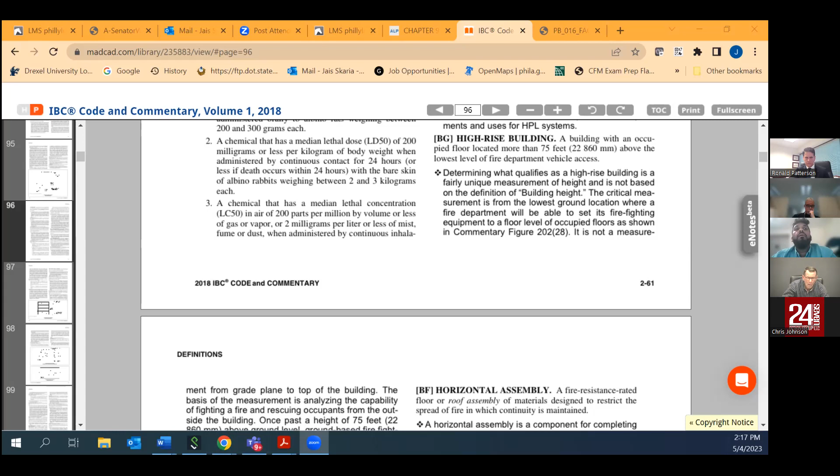It is not a measurement from grade plane to the top of the building. The basis of the measurement is analyzing the capability of fighting a fire and rescuing occupants from outside the building, right? Once past the height of 75 feet above ground level, ground-based firefighting will not be sufficient. High-rise buildings must comply with the requirements of section 403. Because there's occupants past the height of 75 feet, that's the reason why high-rise requirements are required for this specific building.

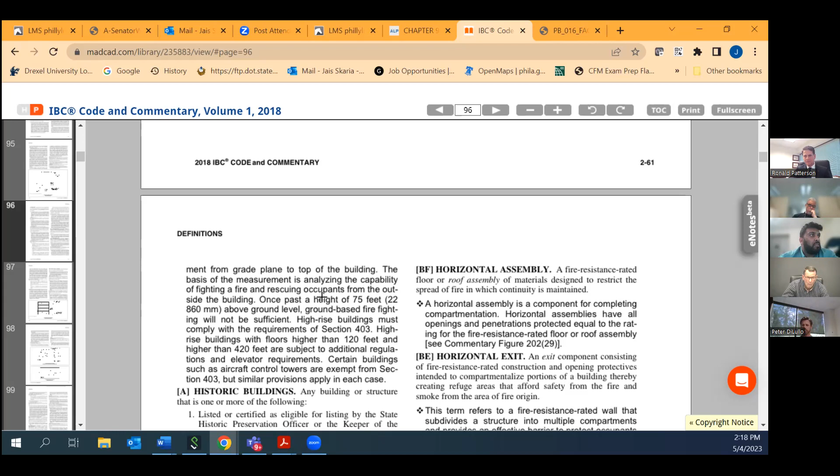Jace, isn't that entire section you just read predicated on occupied floor? Just hold up here. Sorry. Yeah, that's what I was going to ask you, Jace. It said back in the beginning, occupied floor. And so you're saying occupied floor doesn't have to be enclosed? Where do you say that? Back up to the beginning page. The critical measurement is based on those.

So may I read the definition of occupied floor from the IBC? Sure. So, well, occupiable space is the closest thing we have: a room or enclosed space designed for human occupancy in which individuals congregate for amusement, educational, and similar purposes, or in which occupants are engaged at labor, and which is equipped with means of egress and light and ventilation facilities meeting the requirements of the code.

Go ahead, Jace. I mean, as a department, that's what we classify as a high rise, and we are the authority having jurisdiction. I know that Mr. Patterson went to ICC and got an interpretation, but based on our information and based on the chief code official, we are requiring this to meet section 403 of the 2018 IBC, based on this definition and the research that we did on our end.

So if I could just add one thing, and this is similar to what I said when I last testified. As a design professional operating in the city of Philadelphia with our offices in Center City, I can point to examples of projects that have been approved under the same code with the exact same building with an occupant load of 498 people on a roof. Understood.

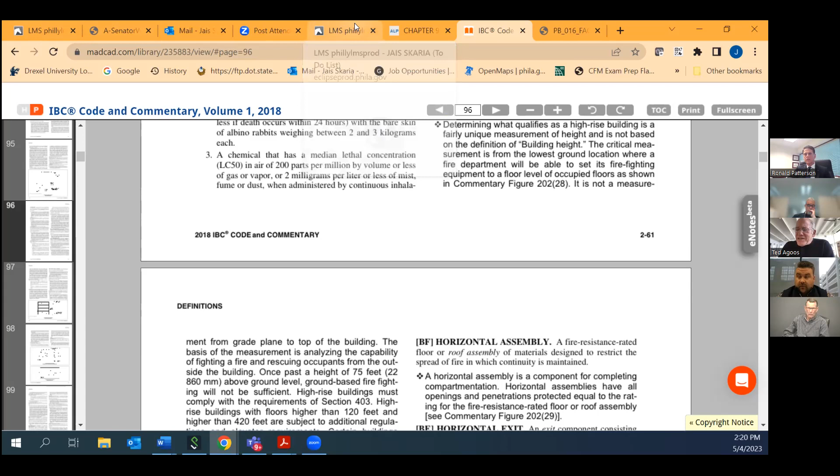But I mean, I understand your concern and your comment in terms of codes changing and evolving, but that being said, the timing is what the timing is, and an FAQ is not an amendment to a code. I'd argue that all day long, Ted.

I can't speak to whether it is and how it's regarded, but, sure. Leave that up to Al and I, and the fire department, to kind of address how an FAQ, what's the process for that either turning into a bulletin or being adopted as part of a code amendment, correct.

Don't know. So Jace, the International Building Code that they're going by in 2018, is that where we're going off of? Is there anything different today? We're still on 2018 IBC.

And how high is the floor below, from the ground up to the floor below the deck? 73, was it 71, Christie? 71 and change? 71.5? Sure, somewhere around that, 71 something. 71 feet 7 3/8. That's to the top floor, not to the occupied deck. Right, that's what I was asking.

Occupied floor. Yeah, because looking at it, if that's under 75 feet and we're not considering the deck a floor, then that's my question. That's why I asked that. And what's the height of the deck above? 83 and change, somewhere in that range. Okay. The roof deck, 83 and change.

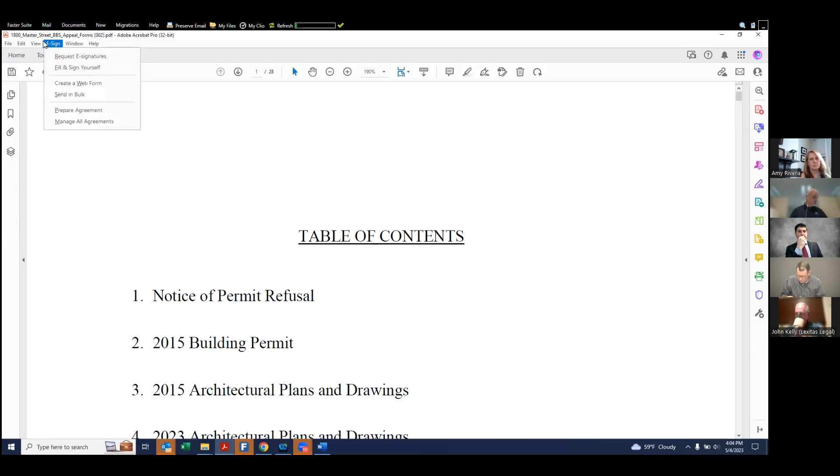So in my materials, you should have received the notice of permit refusal. This is an interesting scenario. We obtained a building permit in 2015 to put a 4-story addition to 1800 Master Street, which is a corner property at 18th and Master. For various reasons, including issues with the neighborhood in terms of vandalism, a corporate restructuring, and a pandemic, we built the 4-story structure, did external and internal framing and put the facade up, but we have not completed our project.

So in 2023, my client hired a new architect who merely filed the same paperwork that my client filed in 2015. Unfortunately, the code changed where, because it's a 4-story structure, it required 2 sets of staircases. I will say this, the 3rd story to the 4th story is 1 bi-level unit, so the opening is merely on the 3rd story. But anyway, we're seeking relief from this board to allow us to continue our development of this building pursuant to the 2015 building permit, where the plans submitted in 2015 were merely refiled in 2023.

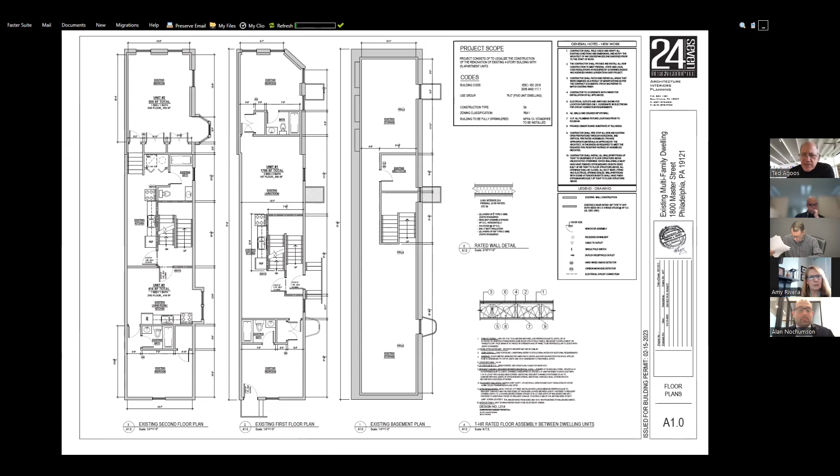Amy, do you have the screen control? No, I don't have it. Oh, okay. That's Alan's screen. Yeah, there we are. All right, so 3rd and 4th. So you're asking whether this stair tower that shows up on the 3rd floor, well, I guess I was looking at older plans, it's a little bit beyond. Could that stair tower be accessed from the 4th floor?

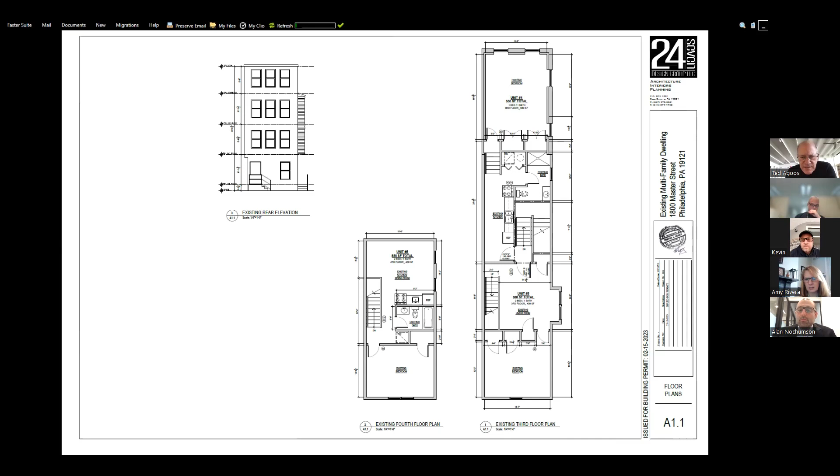So the architect, unfortunately, is not responding to my telephone call. I would ask Mr. Matheson, he's an experienced contractor. Kevin, is that a doable solution, what the board member stated? I'm not following. So I'm zooming in. The stair tower is kind of beyond the fourth floor. Could that stair tower be extended up? Yeah, my understanding is this is the internal staircase tower for the building itself. Correct. Right.

So I think, Amy, what you're suggesting would be that where that existing kitchen dining room is in unit 5, if the stair were continuing up, it would be a bump out on the right-hand side of that floor that would enable you to continue up from below. A bump out of the roof? Right, but to get to it on the third floor, there's that little closet. That would kind of go away. You would get onto that stair and continue up. So essentially, I think it would still give you 2 ways down into unit 5, rather than tying you into the main stair.

Maybe I'm just trying to wrap my head around it. That is the main stair, isn't it? Yeah, it is. You'd be funneling right into the main stair tower. I'm just wondering how you separate it, where instead of going into a closet, you would be going to a vestibule that would let you into the lower floor of the bi-level. Yeah. So let me try to call the architect again. Or you just have another landing over that stair tower, somehow you get back down. Yeah, that closet would probably go away.

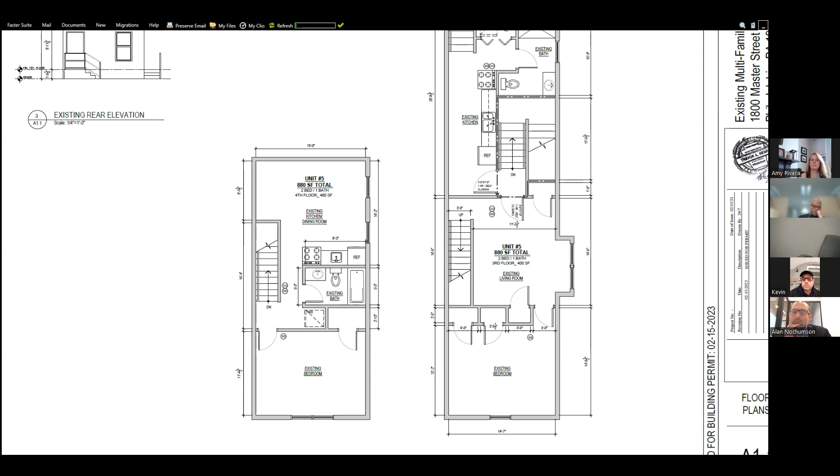But to go off what Kevin's saying, even if you extend that interior exit enclosure up, you still only have one exit. Right, because the only way, you have two ways to get into that exit. That's all it does. Yeah. I was actually going to suggest that maybe we do go into the breakout room while we're waiting for the architect anyhow. Okay. Maybe we should just talk about it.

Well, so this is a corner property. First of all, again, this is a bi-level unit, this fifth unit that goes onto the fourth story. So really our point of entry is on the third story, but how would the board feel about Jacob's ladders? What are Jacob's ladders? The Jacob's ladders are ones that are attached to the lintels as emergency ladders. Do they have one that gets you down 4 stories? I don't know, I'm going to ask the architect, but we've done it before. My understanding is that there's legislation that was proposed, I don't know if it was enacted by the city of Philadelphia, regarding Jacob's ladders. With regards to multifamily structures, it's an encouragement, they have an incentive program.

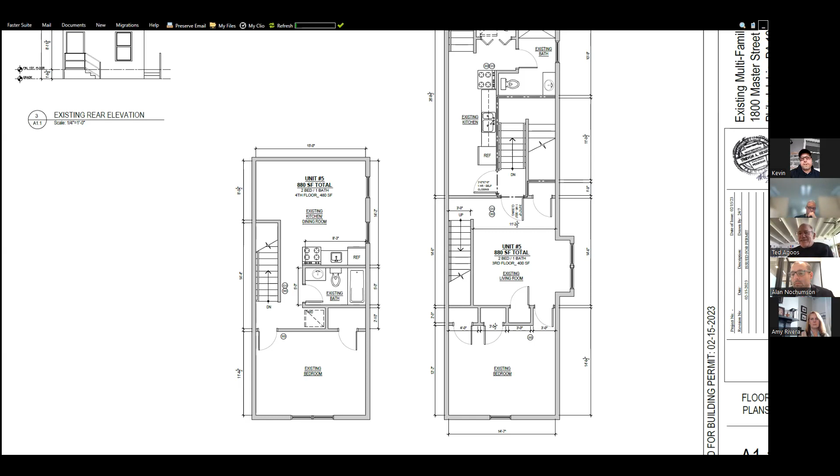And to answer your question, it's not based on stories, it's based on feet. So this building complied at the time, and even still, it's only the 4th story, but the ceiling heights are only 8 feet, which is code. The building does not go past the current code, 30, 35, 38 feet. Chris, the architect, can answer that better. But height wise, yes, those ladders will reach ground level. And additionally, if Alan hadn't mentioned it, the building is fully sprinklered as well. Right. Again, I think if we stepped out for a minute, it would be helpful. Okay, all right.

So, right. Everybody on board? Yes, Chair. Okay, I don't see Ted. Where's he at? He's still in the room, maybe? Give him a second. He is still in the breakout room. All right, there he is. Okay. Everybody back online? Recording in progress? Yes. Okay.

Is your guy here? Yes, Chris Johnson of 24/7 Design is now in the virtual audience. Okay. Amy, you want to explain to them what you're looking at? Sure. We looked on Google. I'm going to share screen. Why is it not there? I'm sorry, pardon me.

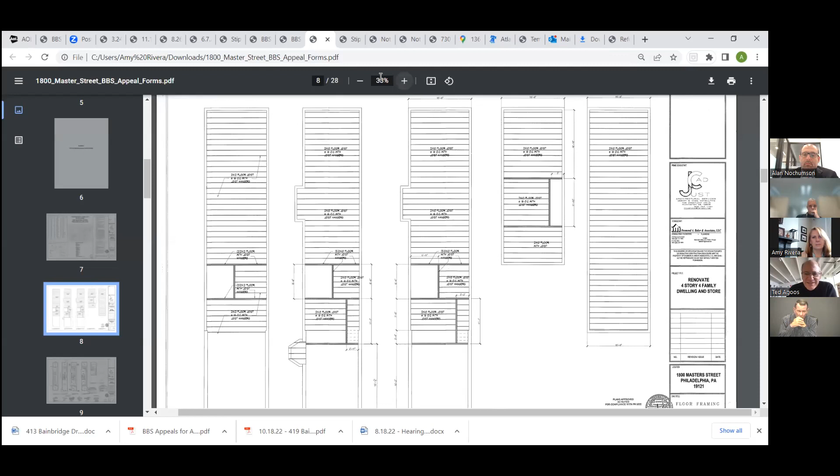So the architecture and structural drawings are showing a very short 3rd, 4th floor, but a very big roof over it. And then when we go to Google, can you see my Google images? That 4th floor is much bigger than what you're showing. The plans show the roof coming all the way across, but they show the 3rd floor stopping back here somewhere. We're not understanding what was built. Is this your building? Yes, it is. Do you want to go to the plan then, Amy? Let's go to the architecture. Why, what is in this space that's much bigger?

That was built and is enclosed, but doesn't show up on the 4th floor plan. Well, both of those should go all the way to the back of the building. And they do. They do? That's the back of the building. I mean, well, the front of the building, or is that just sort of... Well, the original building has a 3rd floor that only comes up so high. Got you, right, okay, got it.

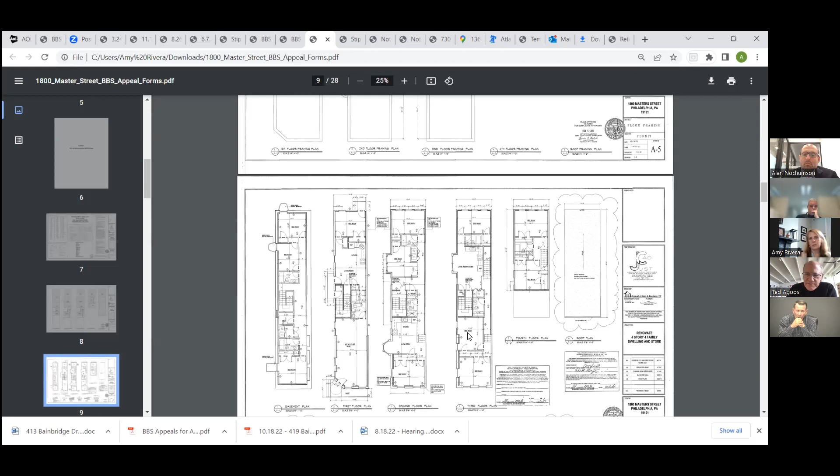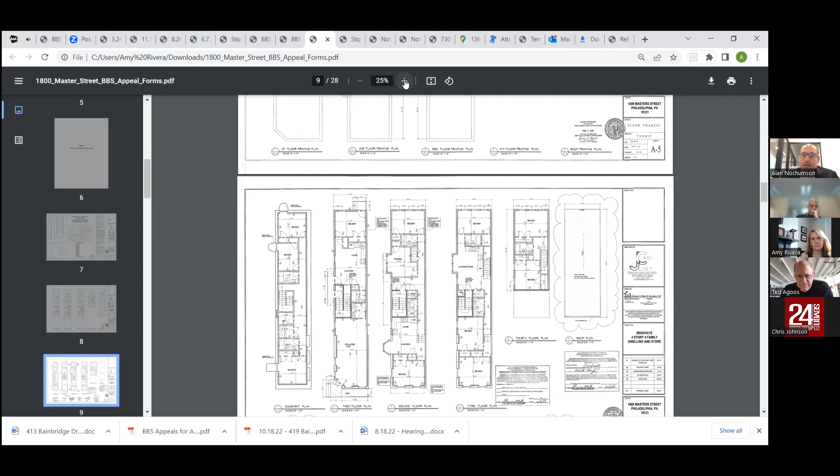Chris? Yes. Right. So there was a question regarding the fact that the roof line goes across to the older structure from a field perspective, but from a drawing perspective, it only goes 3/4 of the way. Unfortunately, I don't know if it was noted that we were not the original architect of record for this project. The last time I was in this building was maybe 2 years ago. These are the existing as-builts that we're working from to get approved. But from my knowledge, everything that you see there is currently built that way.

Kevin? Is there just dead space above the third floor? How are you doing, Ted? Actually, in this set of drawings, there is a section that kind of explains what's going on. Yeah, that kind of explains what's going on. So it would be really easy to extend the stair tower up to this level, because it's already enclosed that way. Yeah, it's already under the roof.

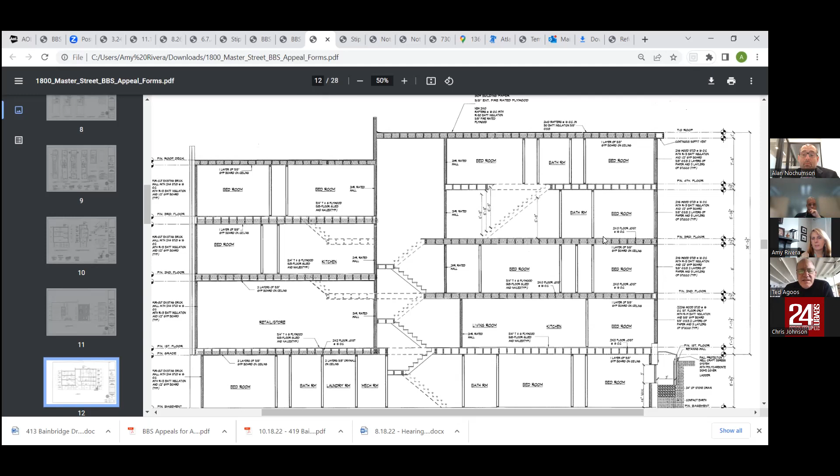And if we ask you to extend the stair up to this 4th floor level, it's still not code compliant, but it makes us feel a lot better. Right, Amy, it would still be one exit, right? Right. We have one exit into the stair tower versus having to come down these steps and then into the stair tower here. Hi, Amy, can you go back to the plan? That would definitely be easier to do than to add another staircase.

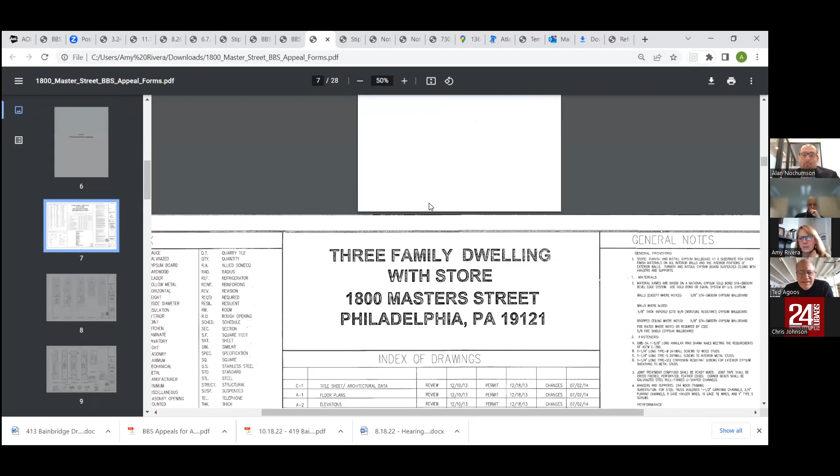I forget, are these the old plans or the new plans? That's the new plan. Wait, no, these are the old, correct? Yeah, those are the old plans, and those are the same thing as well. But am I missing something here? There were floor plans labeled basement, but the front of the building has 4 floors, and the back has 4 floors, or 4 occupied levels. No, the front of the building has 3 floors. Well, if you look at Google, there's windows on 4 floors. No, I'm sorry, let me go to Google again.

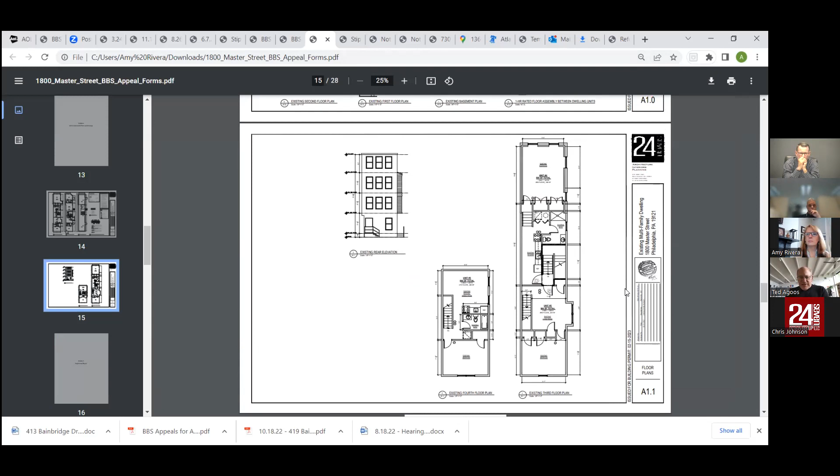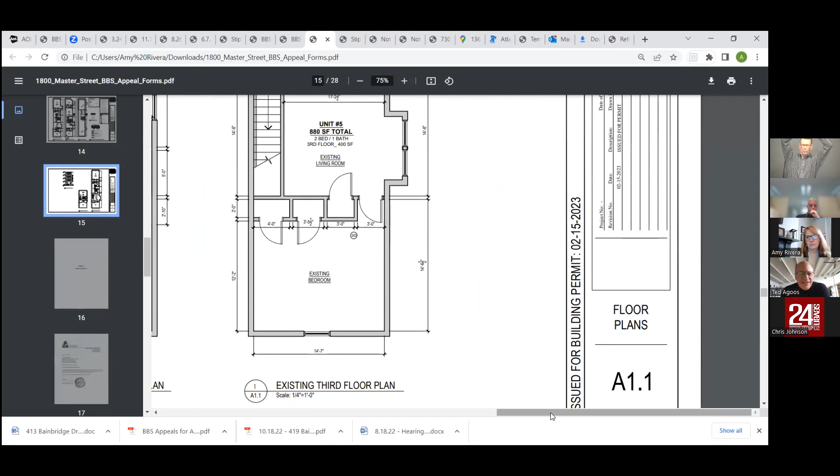The currently proposed plans, when were those done? Did you want me to go find the date on them? Yeah, if you zoom in, the date is on there. Because these plans you're looking at now are the same exact plans as the approved ones. 2/15/23. So basically they're the same as the previously approved plans. They look different. They're not the same.

Look where this wall is, where that stair tower is. This cuts over the stairs, but in the old plans the stairs are way back here. Totally different location. And the drawings are oriented differently too. I know, but it would be easy to extend these stairs, but in the newer drawings, the stairs got pushed forward under this. Right, and the size and location of the bedrooms... If this was literally all framed out and it just didn't get finished, that would be one thing, but it seems like it's been redesigned.

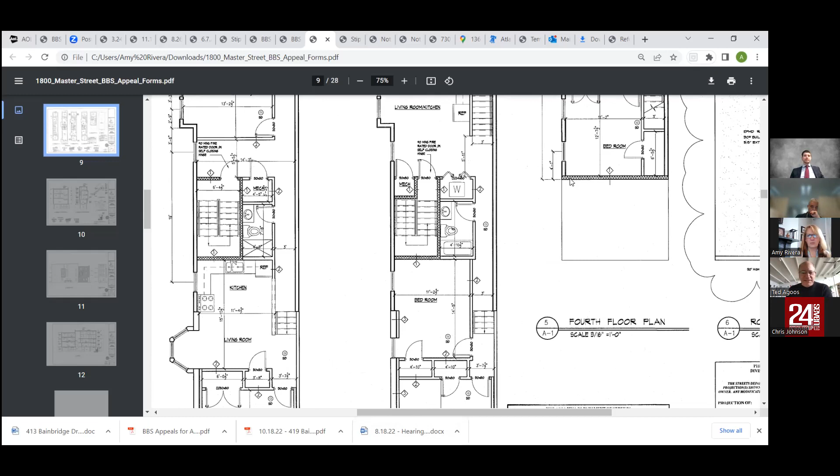And it's Amy's saying it may be within an envelope that is not. And look at the distance where that fourth floor is to this bay. If you go back to Google, that bay is right next to the fourth floor. The fourth floor doesn't stop way back here. There's an extra room up here.

Just thinking out loud, I think this should be continued, or essentially, I think this needs to be looked at, drawn up accurately, resubmitted for the plan examiner to take another look at it, given the real conditions. I mean, we can't evaluate this.

We want to be helpful here, but it appears that there's a lot more living space up on the top fourth floor than the plans indicate. And so our concerns about not having two means of egress from the upper floor are not what they would be if the plans were accurate. Yeah, there's more fourth floor than it appears to show.

All right, well, how about we have a continuance? Chris will do a site visit, update the drawings based on field conditions. And we'll see what the examiner says, and then we can reconvene. Yeah, and it may have to be an amended building permit that gets a new refusal. It may be written up differently at that point. So we're willing to see it when the time comes.

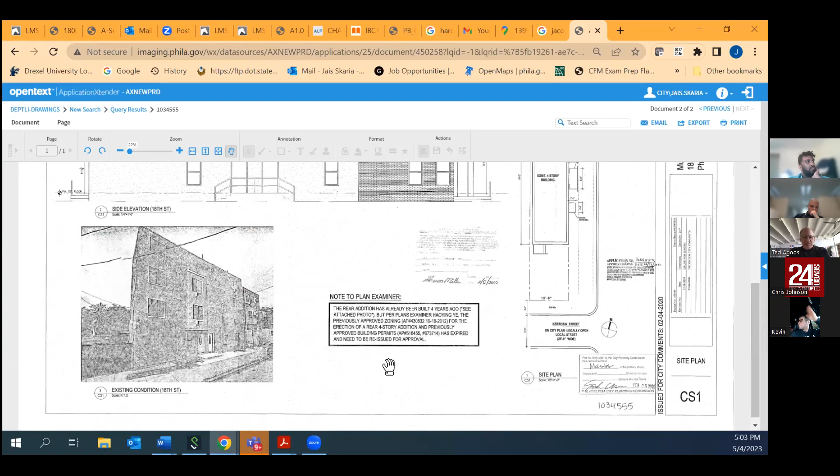So Jais, would it make sense for them now, in these new revised plans, to extend that stair tower up? Yeah, they can. If they do any kind of deviation from this, they have to go back in front of the zoning board. But the stair tower would be within that enclosure. Then it should be okay. But remember, you still only have one exit on the fourth floor level. Right, but looking ahead, it might be more palatable to us. Right. Okay. So we'll show that stair being extended up, depending on the conditions of the field, showing that as new. Okay.

All right. So is this being continued? I think we might have to just deny this one, and then we'll just add another review for this, and then they'll just refuse the next one. I think that might be the best course. Deny it because you'll just state that accurate building plans were not provided for the board to review. Updated set to be reviewed by plan examiner, and then we'll add a new MI number for the next hearing, if that's okay with everyone.

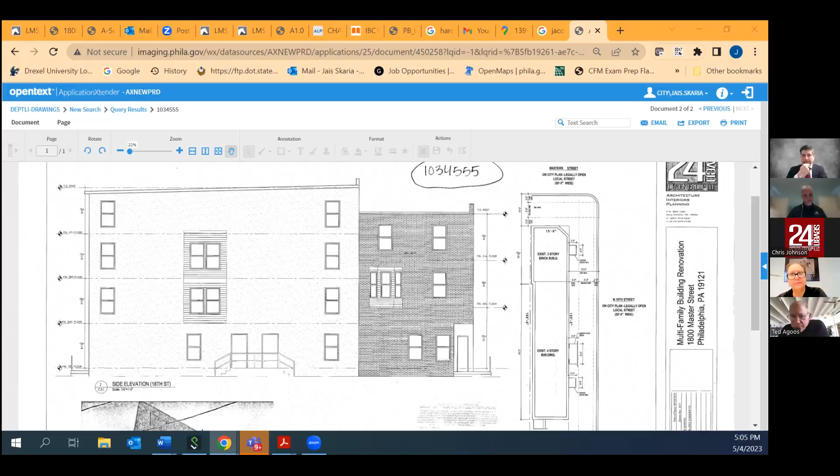But just to be clear, Jais, Fred will still be able to be the examiner for this one, right? Yes, we'll keep the application open. I suggest that you submit the application as soon as possible before he cancels. Yep, okay. Any other questions? I just need a withdrawal letter from someone saying you're withdrawing the appeal application. I'll make sure my office sends something tomorrow. That's fine. You can have your office send me something by email. Okay, that'll be great. Thank you.